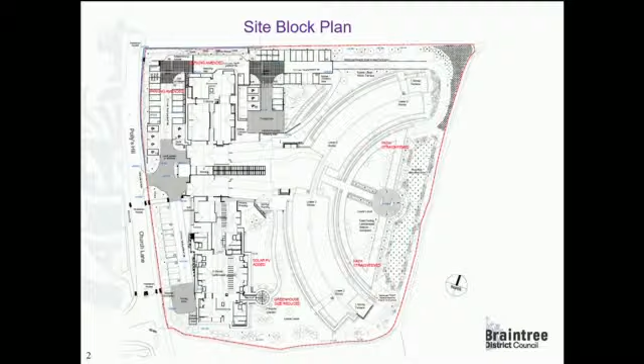This application has previously been considered by the Planning Committee on the 2nd of November 2021, where members resolved to grant permission subject to the completion of Section 106, a deed of variation to modify the Section 106 agreement, and subject to a list of conditions.

At the last Planning Committee discussing this application, members discussed some of the representations submitted by the immediate neighbours. Those representations relate to boundary disputes, raising of land levels in the south, and improper care of the water stream. Following the Planning Committee, officers considered it prudent to withhold issuing the decision and to investigate the matters further.

Subsequently, officers appointed an independent surveyor to conduct a topographical survey in January 2022. The survey related to three matters: the first relates to the relationship of the proposed development and number 110 Church Lane; the second relates to the land levels in the southern part of the site and the potential effects on the watercourse; and the third matter relates to watercourse management during the construction period.

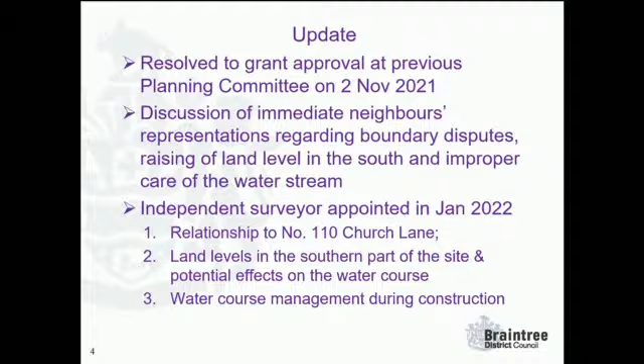This slide shows the last two approvals, including the original approval under the 2015 application number. The lower part shows the approved plans that have been approved under the previous variation application. As you can see, these are enlarged plans—I just want to stress that because these are quite large-scale plans, a slight deviation of measurements can result in quite a significant change in terms of the figures.

I just want to highlight that the latest representation and the previous verbal statement just read out earlier relate to measurements measured from the neighbour at 110 Church Lane regarding the red line as shown on these two plans, which are the same as the one shown on the Ordnance Survey registered at the Land Registry. However, the black line does not reflect the actual on-site situation of where the shared boundary is.

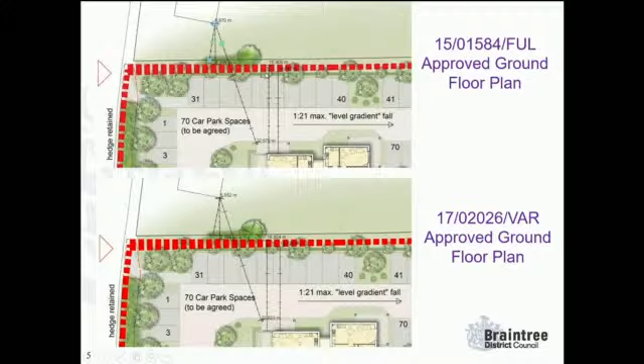This is the current proposed plan showing the northern boundaries. As you can see, there's a difference between the overlay of the OS map and the topographic survey submitted by the applicant in the original application. The OS map is outlined in the black boundary, and the blue one reflects the on-site situation. So the Land Registry map actually shows that the neighbouring property is slightly further away from the shared boundary, which is the red line here.

The blue application line here was the original application site boundary for the previous two applications, and there has been a long ongoing land dispute between the neighbours and the applicant. Therefore, the applicant under this current variation application proposed to slightly reduce the boundary into this red line to reflect the existing on-site situation of where the shared boundary fencing stands.

This little extract also shows the original topographical survey submitted by the applicant, which the neighbour has not disputed. As you can see between the two, it does reflect the same topographical survey.

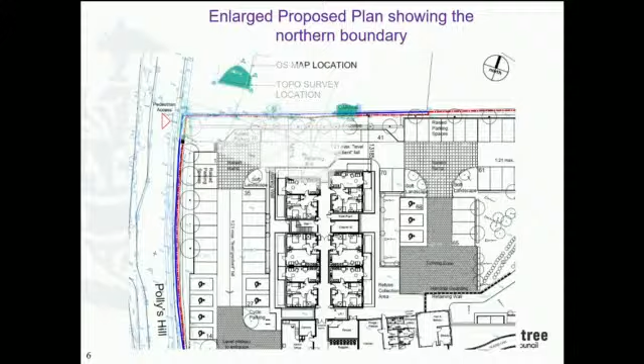In this slide, I want to show you the proposed plan and some of the measurements we found following the independent topographical survey conducted last month. As you can see, from the corner of the neighbouring property 110 Church Lane to the existing fencing is about 6.6 meters, and from the corner of the neighbouring property to the corner of the nearest balcony of the proposed development is about 20.6 meters.

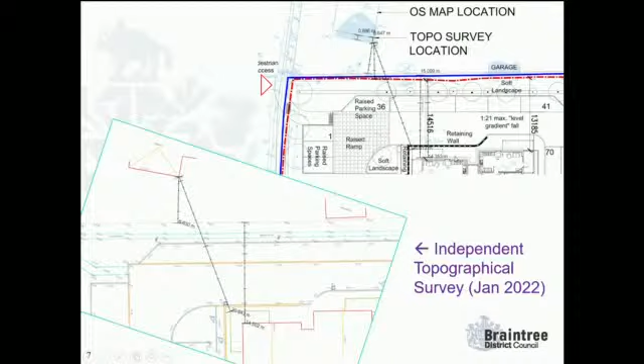That tallies with the proposed plan at the top right corner. Therefore, officers find that the distance between the neighbouring property 110 Church Lane and the proposed development is more or less as stated. Members are reminded that under the current application, the applicant also proposed an amendment to slightly widen the building due to brick size. That's why in the previous committee report, officers noted that the overall width increase is only akin to a brick size, about 21 to 23 centimeters.

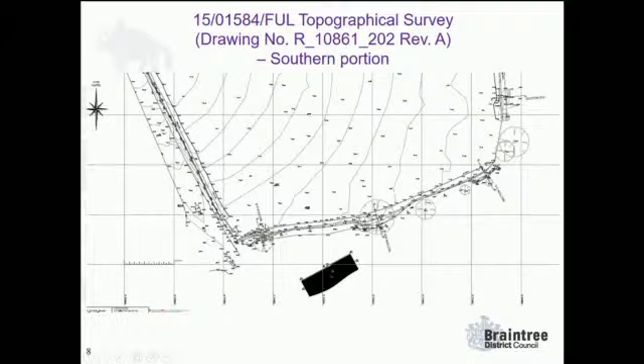In relation to the second matter, related to the raising land level, this slide shows the original topographical survey showing the southern part of the site. I apologize because of the scale of the plan it is very difficult to see the actual measurement, but I will do a bit of an enlargement in the next slide.

The upper part of this slide shows the proposed lower ground floor plan with some topographical points. The bottom shows the findings of the independent topographical survey conducted last month. If you refer to the yellow circles, they refer to ground levels slightly higher than they should be compared to the original topographical survey, and the blue circles reflect where the on-site situation is slightly lower than the original ground levels.

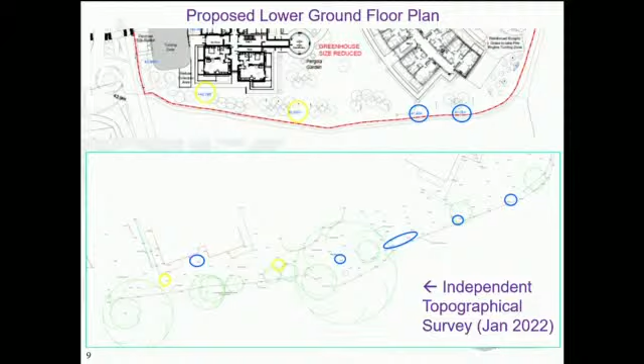Altogether, whether the existing on-site ground levels are higher or lower, we're talking only about 10 to 20 centimeters difference. Members are reminded that the site is still currently under construction and not completely finished, and there will be landscaping works done in this part of the site.

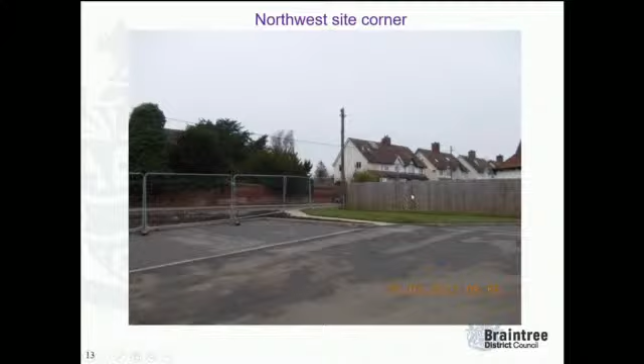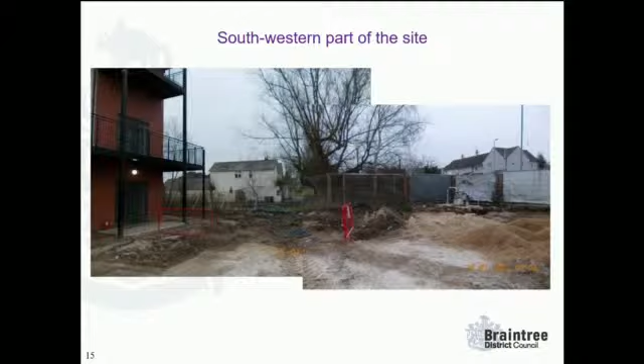Slide 15 shows the southwestern part of the site. As you can see here, last month when officer visited the site, this corner was still under construction and there were piles of soil still waiting to be leveled up for the landscaping works.

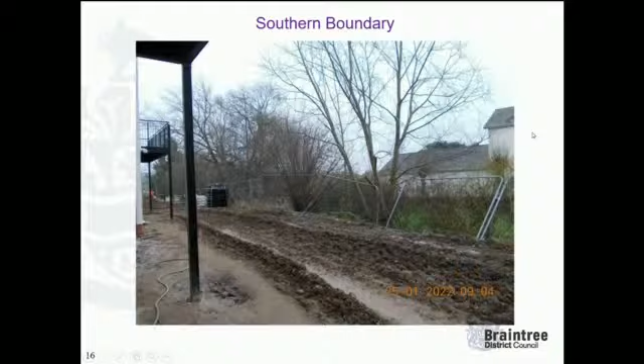This picture shows the southern part of the site, and at the back is a building of number 76 Church Lane. This photo shows the proposed greenhouse in the middle of the southern part of the proposed scheme, and as you can see, the site has not been formally made.

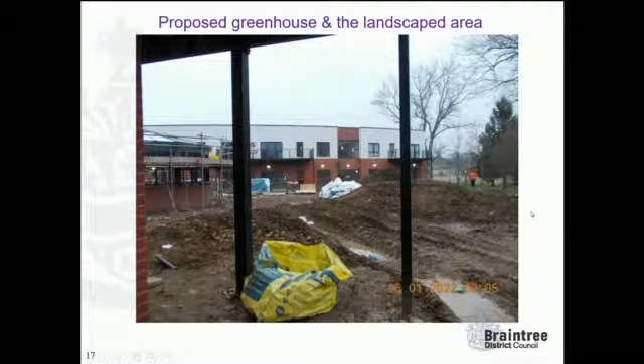Following the site visit, officer warned the applicant and the site manager about the debris in the water course and the debris hanging on tree branches. On the 1st of February, the site manager confirmed with the case officer that all this debris and loose material has been removed from the water course.

So, recommendations. Following further investigations, officers contend that there's no outstanding dispute in terms of raising ground levels and separation distance between 110 Church Lane and the proposed development. Therefore, officers remain with the recommendation to approve, subject to conditions and completion of a deed of variation.

This would modify the Section 106. However, it is also felt important to include an additional condition so that the applicant will make sure that the ground level is restored to the original level. In the committee report, officers have recommended the wording of the new condition.

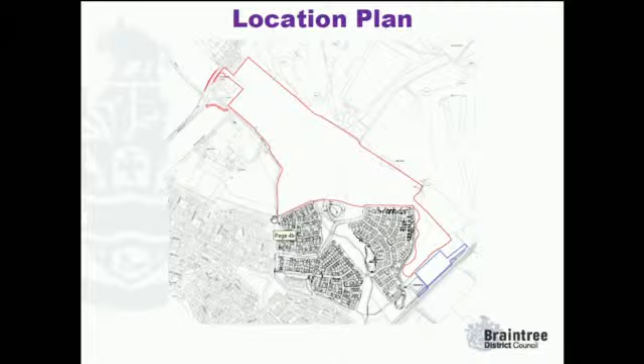You can see the thin red lines along Rickstones Road. These relate to highway works for the improved pedestrian connectivity. But the main body of the application site is here. So we've got the golf course immediately to the north, housing to the south. The main line of the railway runs further to the south here, and then over here we've got a largely undeveloped area. This is the grounds of the rectory and the houses down here. So that's the location plan.

So this is the updated draft allocation plan. This isn't the adopted plan, but this is the post-hearing local plan. So it shows Witham North. So you can see this is the application site up here.

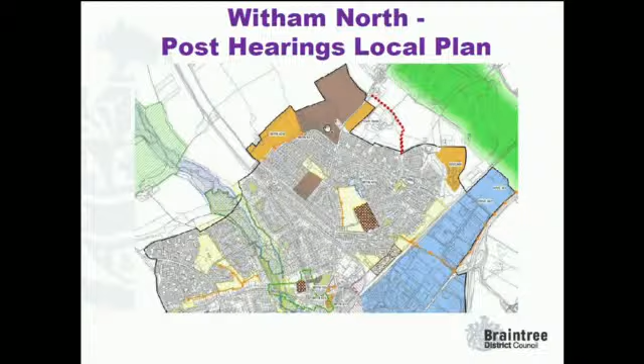The protected lane is shown with the dotted red line. The Phase 3 development is here. Phase 2 development is down here. This is the Eastways employment area, obviously on the other side of the railway line there. And then the other shading we've got here, this is the Conrad Road development over here. And then we've got the school sites here as well.

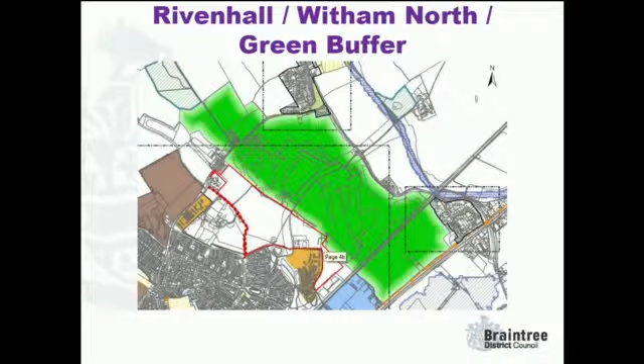Just zooming in a bit closer, we've talked in the committee report about coalescence, and we've shown how we've assessed that. This is coming in a bit closer, so we can see the main body of Rivenhall, the village, over here on the other side of the green buffer. This is the green buffer which covers the golf course and stretches beyond. As you can see, the application site comes up to the edge of the green buffer in the draft local plan, but it doesn't actually breach it. So therefore, we will take the view that that is providing or maintaining that green buffer, which is what's in the emerging local plan.

So there are a number of parameter plans that have been submitted with the application. Although all matters are reserved, we are proposing that parameter plans are approved. So these will be the framework for the reserved matters if outline permission is granted.

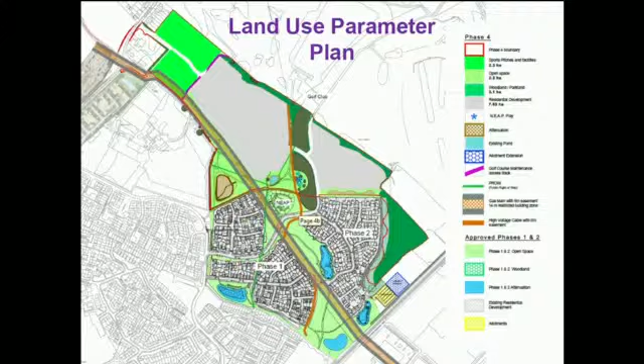So there are a number of other parameter plans as well, showing slightly different elements of the same thing. This one shows the different areas of open space that are proposed, including the SUDS attenuation basin and pond.

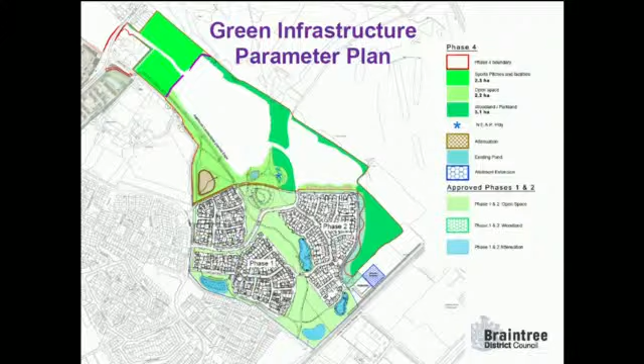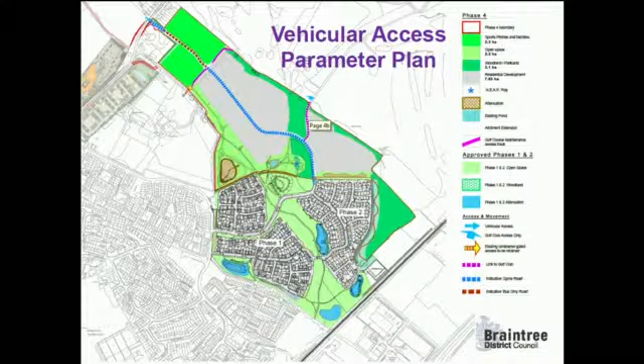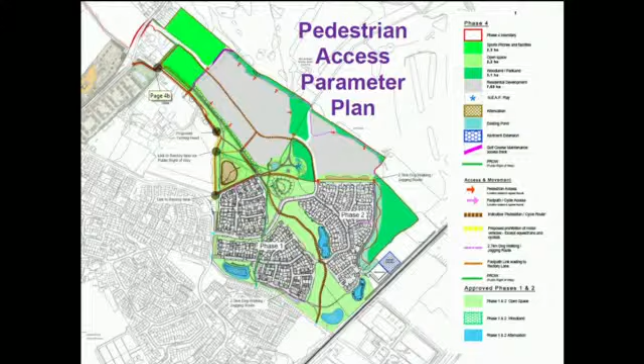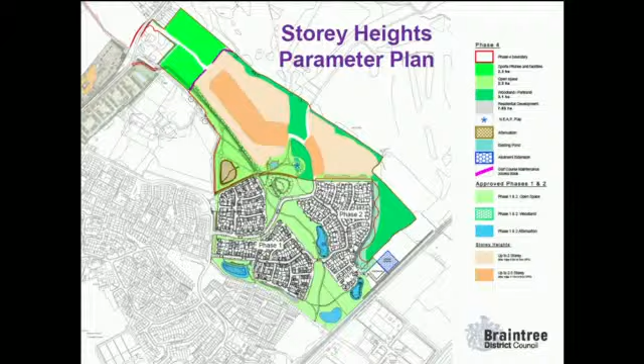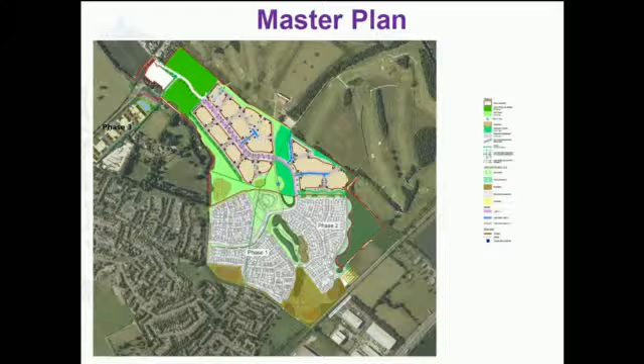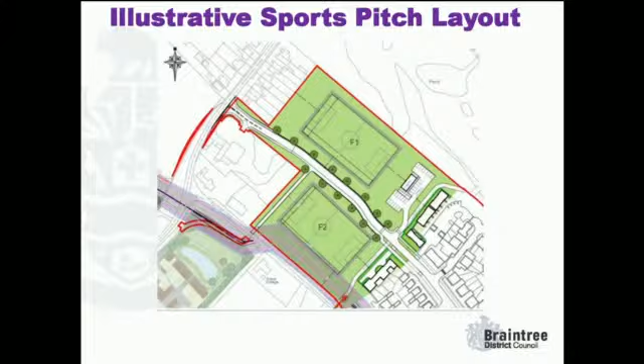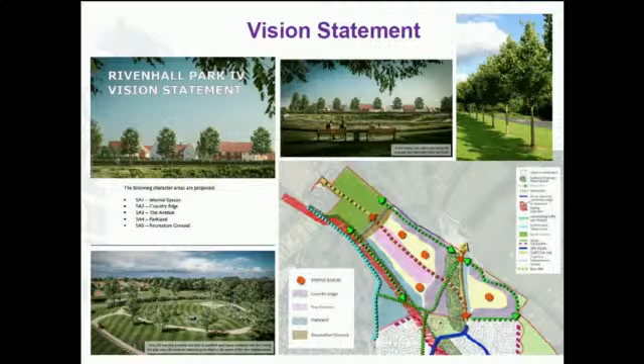We've also received information from the applicant regarding tree removal and tree retention. Two documents were submitted—one members would have seen before October, and an updated supplementary report with additional photos illustrating areas of trees being removed, with further explanation for the removals. This is all illustrative material since all matters are reserved, so there's some flexibility, but the applicant has set out the likely extent of losses and the explanation why, covered in detail in the committee report. There are tree losses and some loss of hedgerow, but also considerable scope for additional planting, and we think the tree and hedge loss proposed is appropriate for bringing forward the site and planning the development appropriately.

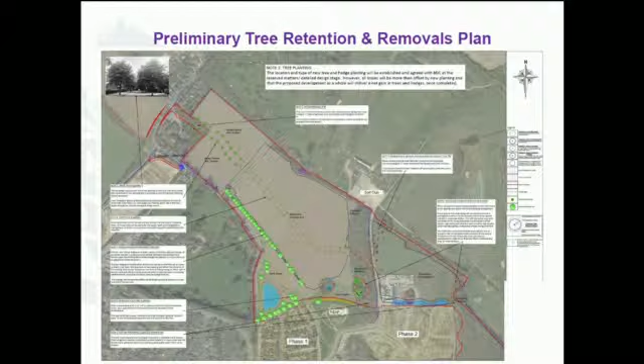In terms of ecology, again covered in the committee report, but just in terms of the headlines, there are reptiles, protected species on site at the back of the allotment site, just at the bottom. These would need to be translocated, and there is within the 106 provisions for that to be done within the application site. So the protected species would be trapped and relocated within an area where suitable habitats will be provided.

No objection to that approach from our ecologist. In terms of bats, there is bat activity observed on the site. The main issue that remains is that there is a dead tree which would need to be removed as part of the bus gate provision. Because that tree is covered in ivy, it wasn't possible for it to be surveyed, but it does have bat roost potential, so there is a condition covering that to ensure a survey is carried out. The tree couldn't be removed if it is providing a bat roost, so that's covered by condition.

So those are the principal ecology issues. There is also the potential for skylark plots on the site, but those are being mitigated, and that's covered through the section 106 as well.

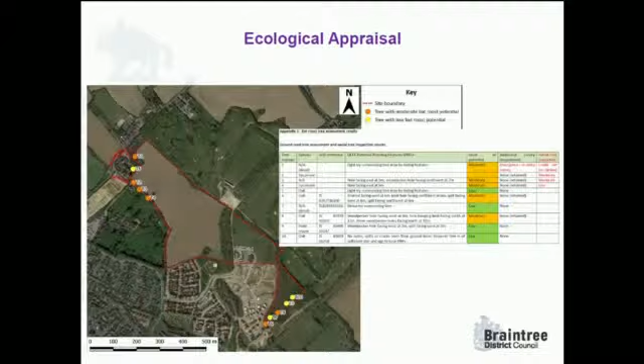Because it's highway land, the land can't be obstructed, even though it may be privately owned. Whereas with a normal front garden someone could build a boundary wall up to their front boundary, because of the highway land designation they're not able to provide that obstruction within the visibility space. So that can be achieved within highway land and land that the applicant controls.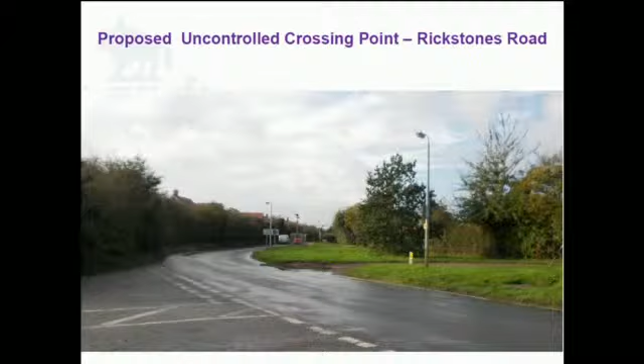A hole would be provided in the hedge - don't think it was as wide as Councillor Wright was suggesting. It would be 4 metres wide, through an existing stretch of hedge, not the translocated hedge, but there is hedge removal there. That would provide a potential uncontrolled crossing point on Rickstones Road, allowing pedestrians to cross over and continue along the widened pedestrian cycleway towards the schools.

In terms of the site, these are some photos. This is in the northwest corner looking east. You can see there's a construction compound within the field at the moment, being used in connection with the Phase 3 development, but previously the whole field was in agricultural use.

That's looking from the maintenance track, which runs across the middle of the site, looking north. Those are the properties at Rickstones End that you can see at the top end of the photo there.

This is looking south again from the maintenance track, so this is the centre of the site, and this is the edge of the existing development that you can see back down there. This is Rectory Lane running along the side here.

This is a footpath which runs through the central woodland belt, quite densely planted. Wasn't, I think, planted with amenity in mind, but there is some limited access through there at the moment. This is looking from the woodland belt as you come out, and then the footpath that runs back across the site, and then vice versa.

Another view again from the footpath, looking east towards Rectory Lane.

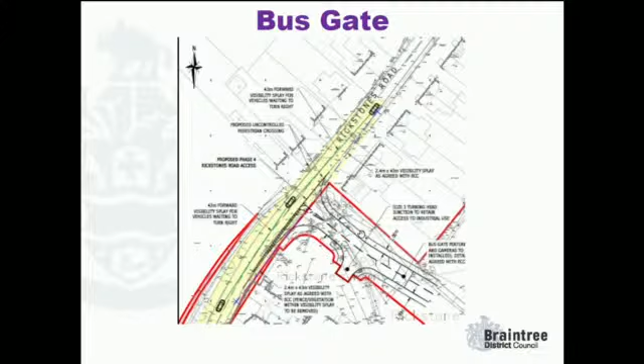The bus gate would be restricted, with traffic enforcement cameras to make sure it's only used in accordance with its permitted use. As I said, that would be restricted to buses, motorcycles and private hire vehicles, so not likely to be a regular flow of traffic or vehicle movements going down there. It's not a main vehicular access to the site, and it's not proposed as a construction access either, I should stress. So it is cognizant of the fact that it's relatively close to neighbouring properties.

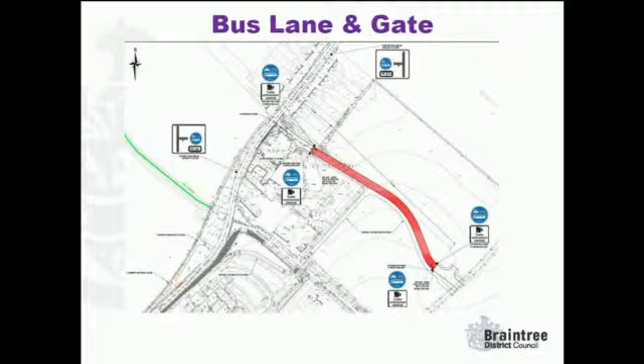In terms of pedestrian connectivity, I was talking about the path along Rickstones Road, so just to highlight that on this plan. One of the proposals is that, through the Section 106, occupants will be able to walk out from the development here onto Rectory Lane, cross into the Bluebells development over here. This is a path that runs through the Bluebells development, through the gap in the hedge that I referred to, the 4-metre gap, cross onto Rickstones Road, and then carry on along Rickstones Road up to Conrad Road, where you've got Rickstones Academy and other schools further along.

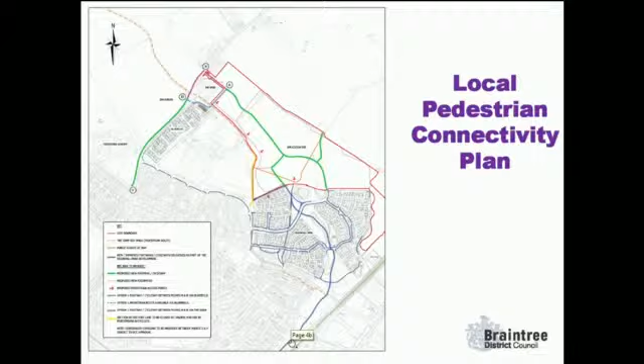In terms of other connections, we've got cycle connections and pedestrian connectivity coming out from the south as well, and I'll come back to that in a moment. So these plans show the Rickstones Road proposals. I won't run through all of it, it's quite a busy slide, but I can come back to it if need be. There is a package of works to improve pedestrian and cycling facilities along Rickstones Road.

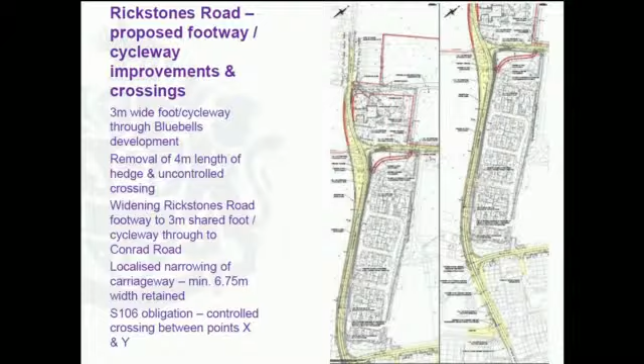Rectory Lane, this is what I was referring to - that photo I mentioned was looking up here, at that tree on the corner. The proposal is that Rectory Lane has a restriction put in here, with a traffic regulation order approved. That will prevent through traffic, so vehicles will be prohibited from using this southern section of the lane. It can only be used by pedestrians and cyclists.

The northern part of the lane retains access off Rickstones Road, and a turning head is necessary so that any vehicles coming down here which need to can turn and get out. So there is that intervention within Rectory Lane, but we think that is, on balance, an acceptable intervention given the benefits of restricting vehicle access over the rest of it, and the additional landscaping that can be provided as a buffer.

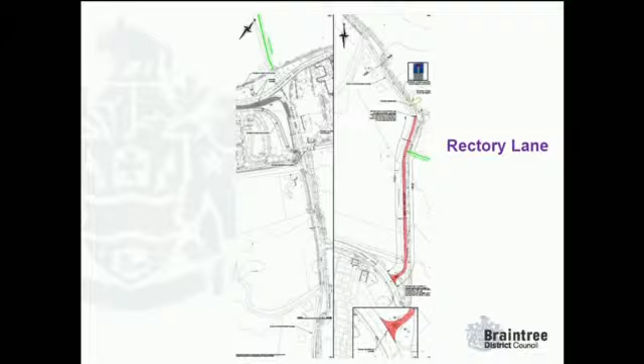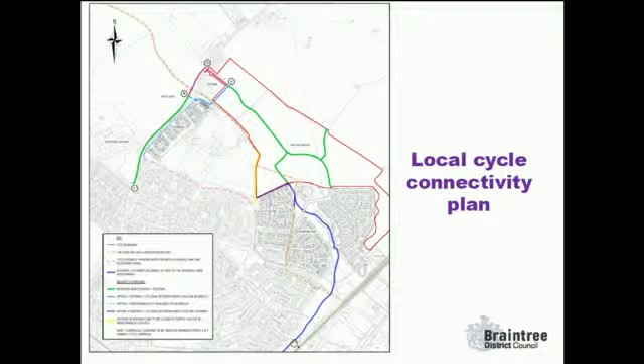In terms of cycle connectivity, that's a similar plan to what I've shown before, but it does lead on to this cycle route from the development running down parallel to the railway line towards the town centre. As the applicant's transport consultant explained, when we're talking about the Collingwood Road scheme, which I'll come on to shortly, we are looking at that as part of a longer route from the site.

The Collingwood Road scheme hasn't been designed in isolation and isn't designed to be a freestanding thing. It is intended to be an extension to what was previously approved by the council in terms of cycle connectivity. So you can see cycle paths within the existing development continue down, and a cycle path will be provided through this open space adjacent to the railway line, by Mott's Lane, by the Bridleway Bridge over the railway line. Rather than going over the railway line and over that Bridleway Bridge, it will continue down Cutthroat Lane, which is open to vehicular traffic, but is very lightly trafficked and principally used for servicing the substation and allotments, and not a great deal more.

It does go over the level crossing on the Braintree branch line, but then continues down towards the station. So that's a sort of quite lightly trafficked or completely segregated cycle lane, a combination of those things coming down towards the station. And then what the Collingwood Road scheme is proposing as part of this application is trying to improve that connectivity on from the station down towards the town centre.

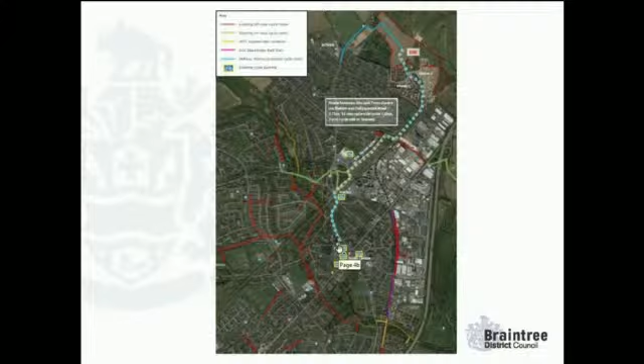So these diagrams try to explain in a bit more detail what is proposed with the Collingwood Road scheme. It comes out from Albert Road. Here, because of restricted highway land availability, it's proposed that this existing footway will be made a shared pedestrian cycleway, so cyclists can cycle on the pavement if they choose to. They can still cycle in the road if they want to, if they're a confident cyclist. But there's the opportunity for less confident cyclists to use that shared facility.

There's an additional Toucan crossing provided here. Just to reiterate, the existing Toucan crossing on the other side of Albert Road will be retained—it's not been removed, so this is an additional crossing. The lights on the two crossings will be phased, so they talk to each other. You won't find a situation where you stop at one set of lights, move through, and then stop at the other set of lights. They will be phased accordingly.

The cyclists can then cross over and carry on down a shared route here to Guithavon Valley. So there is an appropriate width for a shared pedestrian cycle space coming down this route to Guithavon Valley. There isn't room within the highway to provide segregated cycle lanes, or if segregated lanes were provided, that would be at the expense of road space. Given this is a bus route and has HGV traffic, on balance, we need to retain the carriageway width to carry that traffic.

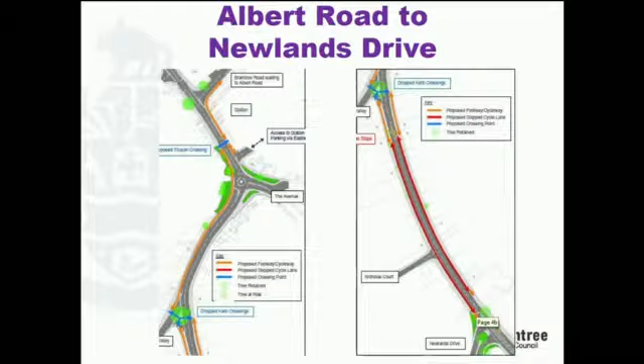None of the trees along Collingwood Road, the avenue trees, are proposed for removal, which I know was a concern previously raised. There are, however, 3 trees which may need to be removed by Easton Road—2 ash trees and an apple tree, highlighted in red, so not particularly clear, but these ones here. These may need to be removed to provide suitable visibility splays for the crossing.

So we put them on as being removed because there is a likelihood that they may be removed. But if the Highway Authority can be satisfied that any of them can be retained and sufficient visibility can be provided, then the trees won't need to be removed. We're presenting the worst case, so worst case is those 3 trees may need to be removed.

In terms of the crossing at Guithavon Valley, concerns have been raised about the junction and how traffic behaves around it, and whether there's a better option. The designer looked at whether alternative crossing facilities could give cyclists better priority over motorists, but the concern is that it wouldn't be safe. Traffic coming off Collingwood Road and down the hill may not have enough time to react to a pedestrian or cyclist who thinks they have priority. So we think it's better not to give that priority to cyclists here as a safety consideration, and cyclists will cross when they consider it safe. It has been considered whether the junction could be improved or tightened up, but we think on balance this is the best and safest solution.

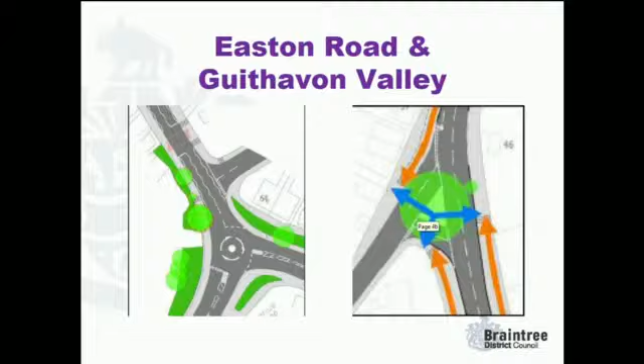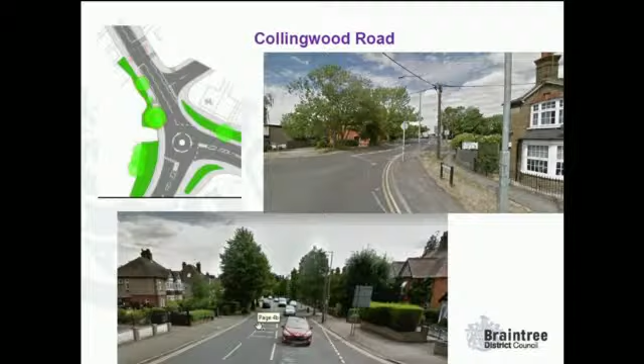There are some additional photos, including the trees potentially being removed in the top right. This is looking down Collingwood Road showing the avenue trees, which are all proposed to be retained. This image, provided by the applicant, shows what the segregated cycle lanes could look like. The pedestrian footway retains its curb line, with a low curb adjacent to the highway. The hatching would probably be removed, but the carriageway width would be retained as appropriate for a bus route and to take HGV traffic.

The provision of the cycle lanes would mean the parking bays along the road would need to be removed, subject to a TRO. There are approximately 20 parking bays with restricted time waiting along Collingwood Road, used or reported to be used by people visiting the surgery on Collingwood Road, as well as a number of businesses, and further down the road, the public hall and a nursery. So there are commercial activities as well as residential properties along Collingwood Road.

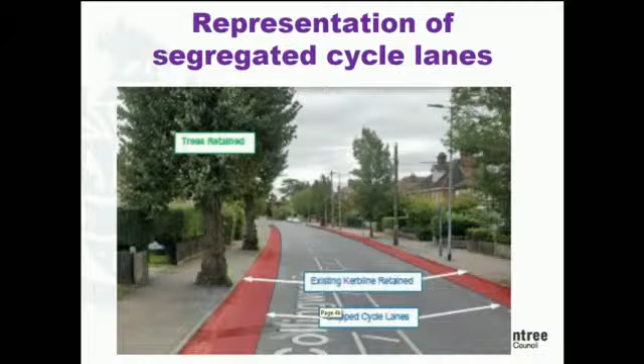In terms of the scheme, we've discussed it at considerable length with the applicant and met with the Town Council to explain it. We still believe, having considered alternative routes including a detailed assessment of the Almond Road scheme suggested by the Town Council, that it was ruled out due to safety concerns because there's a driveway adjacent to a property that could see a motorist reversing onto a shared facility with no visibility at all. So it wasn't that the footway wasn't wide enough—it was a fundamental safety concern, which is why the Almond Road scheme wasn't pursued.

The other alternative schemes have been considered, but we don't believe they offer better cycling opportunities than this scheme. We think they have issues which weigh against them. The Collingwood Road scheme, on balance, is the better scheme. There are compromises that have had to be made because we've designed a scheme within constraints—we've had to maintain the carriageway width and look at other constraints around there. So we're trying to balance things, but we've tried to design it, so far as practical, in accordance with the principles of LTN 1/20. Officers still feel that's the best cycling scheme we should be securing.

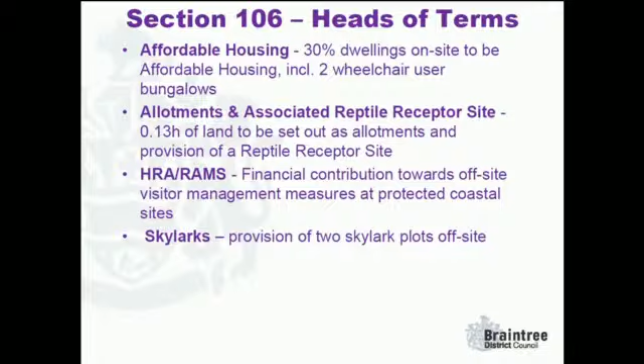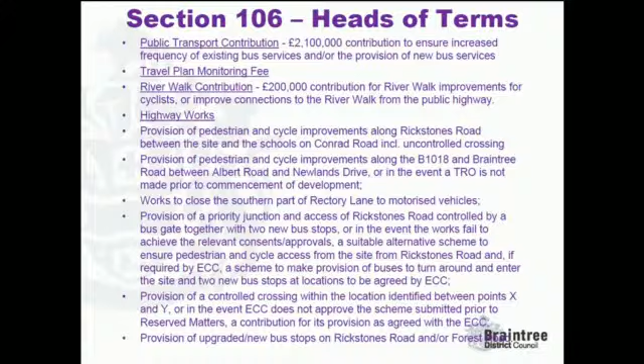So in terms of the Section 106, moving on from the cycling, I won't go through all of the heads of terms as they're reported in the committee report, but just to say it's quite an extensive package of elements being provided, as well as the usual affordable housing. There's an extension to the allotment site, RAMS payments, and skylark mitigation as required, extensive contributions towards a river walk, public transport, and highway works to improve pedestrian and cycle connectivity. There are also grass sports pitches provided on site, generous public open space, and additional financial contributions towards community buildings, education, health, and libraries.

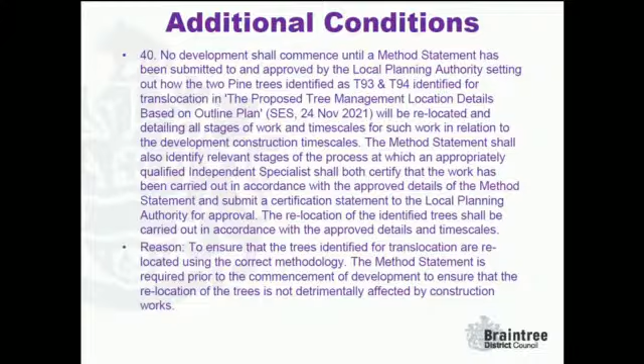There are a couple of additional conditions which I wanted to draw to members' attention. I mentioned when we were talking about the illustrative tree removals, a couple of those trees on the edge of the golf course, two pine trees, were identified as being of good quality by the applicant's arboriculturalist and are proposed for relocation. So we've got a condition to make sure that's done in an appropriate manner.

And then there were two additional conditions which were reported. One was to make sure we had details of solar photovoltaic panels, which are being proposed for every dwelling - something members are continually challenging officers and developers over. So I'm very pleased that's been taken on board by the developer here, and that condition captures that commitment.

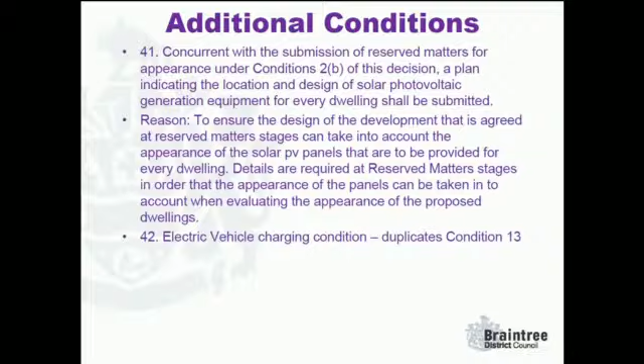I did propose condition 42 about electric vehicle charging - that's in the committee report, but that's my mistake. I got a bit overzealous there and missed the fact we already had it as a condition, so it's already covered by condition 13. Apologies for the confusion between my committee report and the conditions. But again, just to stress something members are continually asking for, rightly so, the applicant is committing to providing an electric smart charging appliance or fixture for each dwelling within the development - something we are usually unable to secure, but another benefit of this development.

So in terms of a summary, members will probably be pleased if I draw to a close. But to say the proposal conflicts with the development plan as a whole, as we've acknowledged. Within it, it is outside the existing development boundary and the proposed development boundary in the emerging local plan. So we have considered that, and that's obviously something which needs to be carefully considered. However, we do think this is a sustainable location, and the package of measures provided by the applicant will provide a genuine choice of transport modes. I think one of the speakers at Question Time said people won't be forced to walk and cycle everywhere. Well, quite so, and they won't be.

The best we can ever do with a development is provide attractive choices. So here we think there will be a genuine range of choices - bus service, walking, cycling for people - so that they may well have a car, they may well need to use their car, but there will be alternatives for shorter journeys within the town.

Part of the reason for having the bus gate, I should add, is that it actually provides some additional flexibility in terms of the bus service. It's not actually agreed as to how the bus service is improved - an existing service might be diverted, might be augmented, or a new service might be provided. But the idea is that having the bus gate provides greater flexibility and is more likely to provide a sustainable long-term service after the applicant's public transport contribution has been exhausted.

But the committee report goes on to set out the required planning balance exercise that needs to be undertaken, whereby we've weighed harms against benefits. There are numerous harms on this, we acknowledge, but there are also very substantial public benefits as well. So when we've done that exercise with a flat planning balance, because we believe we can evidence a marginal 5-year housing land supply at present, we think that on balance the application should be approved.

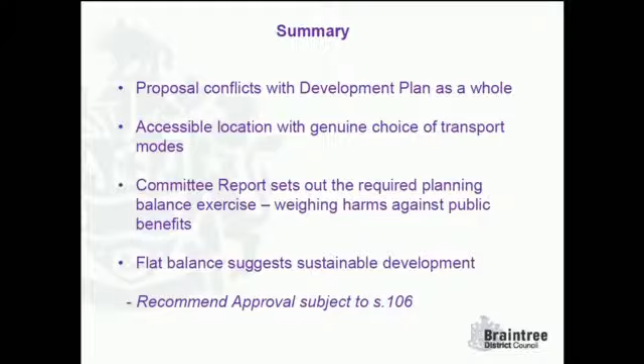I think I've covered the rest of the points. Sorry if that's a long presentation. We've tried to cover the main points, but I appreciate we haven't gone into everything in great detail. I'd be happy to take any questions, and Chris would obviously help as well, should members require any further assistance or have any further queries.

Thank you very much, Neil, for quite a detailed presentation. I made loads of notes when the public was speaking. There's three things I'd like to ask before I open up to members.

There was a comment that Railtrack have concerns about the additional crossing. Have Railtrack been in contact with officers over that item? No, we haven't had anything from Railtrack. I know we did discuss phase 1 and phase 2 with them at some length.

I can remember meeting their representative on site. From recollection, Railtrack's position, as Network Rail now, would be their preference that the level crossing would be closed. They don't want any level crossings anywhere, and that would be their starting point, but obviously that's not possible here. They did talk at one point about whether it would be feasible to put a bridge over the railway line, but that was discounted. They did an assessment at the time where they looked at the number of likely pedestrian movements, and their assessment was the increase in risk wasn't significant, and they didn't object previously. I don't believe the additional dwellings provided here would tip that calculation. So hopefully that answers that one.

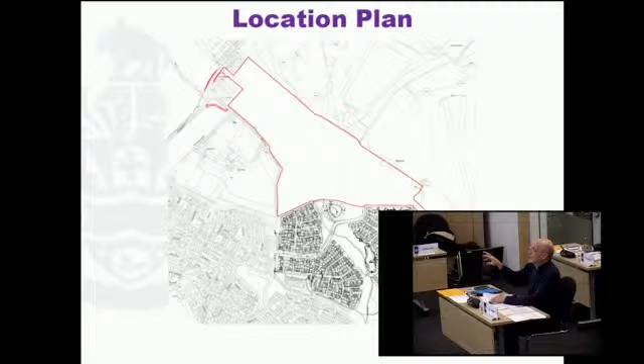Could he now please put up the slide for looking towards the bus gate access from the Rectory Lane junction? Sorry, the actual photograph. No, that one. Okay, so the County Council believes that that's a safe access.

Third one, could you please, and this is my final request, Neil, for that slide, could you please put up this slide for the Collingwood Road cycling at the Jubilee Oak?

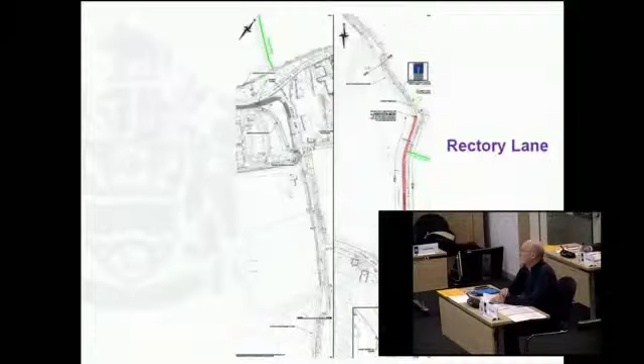That's fine, yeah. So it's not clear to me how that crossing there of the Jubilee Oak would work. Currently, the Jubilee Oak tree has a very nice ornamental bench all the way around it, a metal bench, which was refurbished not that long ago, actually, after it was hit by a car. The space around that on that island is quite limited. So first question related to that, would that bench survive this scheme?

Third point is, Councillor Largo mentioned this, and I'm not absolutely clear. I did look at the plans again today. Where the cycle lane goes up from there on the left-hand side towards the railway station, is it the intention to narrow the existing carriageway width of Collingwood Road? That's the question.

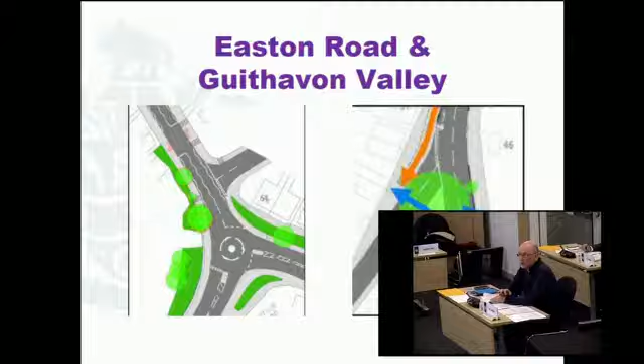So, answer to the questions. The bench which runs around the tree is being retained. I think that was raised as an issue, so that's been addressed — that's been saved or retained, I should say.

So what will happen is, in terms of the crossing, there will be dropped curbs put in, and the cyclist would dismount, cross the road using the island where the tree is, and then cross over. In terms of visibility, notwithstanding what Councillor Abbott's saying about concerns locally, there is considered to be adequate visibility in both directions to cross at that position. So that's how the scheme is intended to work — you'd come down on the carriageway on the main road at the top.

I don't think it's subject to widening. I think there's some verge which would be used further up to make the path wider. You come down to Guithavon Valley, cross with the drop curbs over the island, past the bench, and cross over there.

Well, are officers sure about that? Because when I read the plans, it said that Collingwood Road is going to be narrowed along that section between the Guithavon Valley junction and the Labour Hall in order to provide a 3-metre cycleway footway. I think this is crucial to this whole scheme, because I think a mistake's been made. If that's the case, then Collingwood Road will have to be narrowed by 1.5 metres at that point. Now, that's a bus route, and I think that's going to bring buses potentially into conflict.